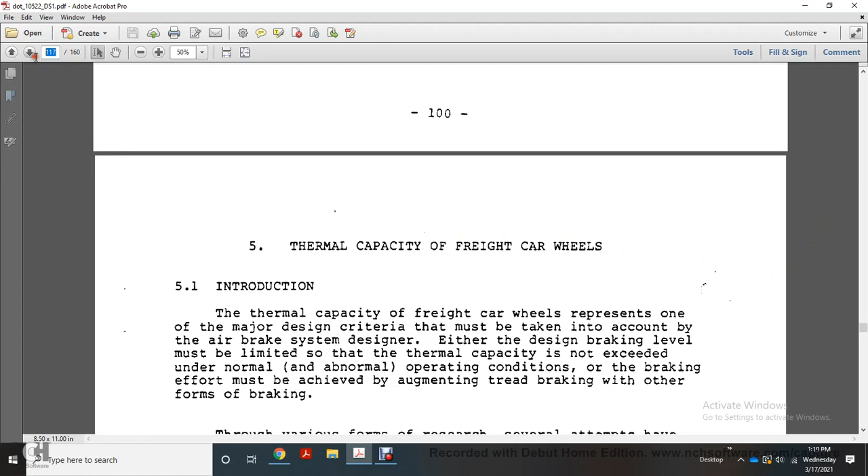Report number FRA ORD 7820, Brake System Design Optimization, Volume 2, Supplemental Data. We're on section 5, Thermal Capacity of Freight Car Wheels.

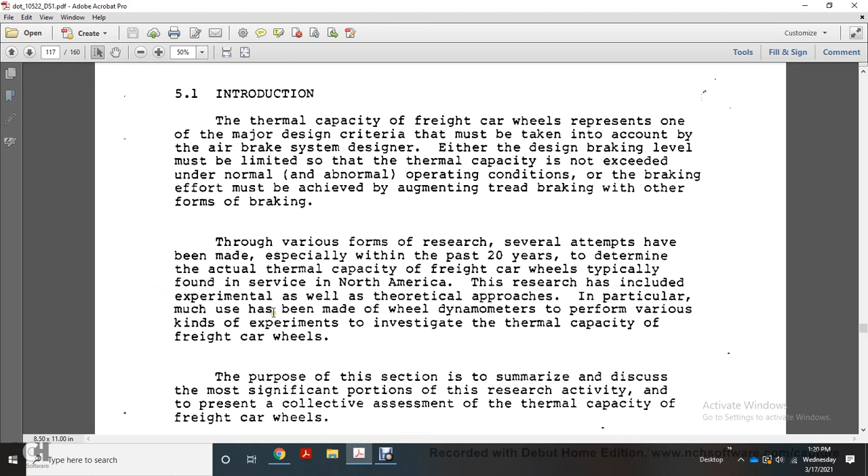Various forms of research, with several attempts made especially within the past 20 years, have tried to determine the actual thermal capacity of the freight car wheel. typically found in service in North America, the research includes experimental and theoretical approaches. In particular, much use has been made of dynamometers to perform various kinds of experiments investigating the thermal capacity of freight car wheels.

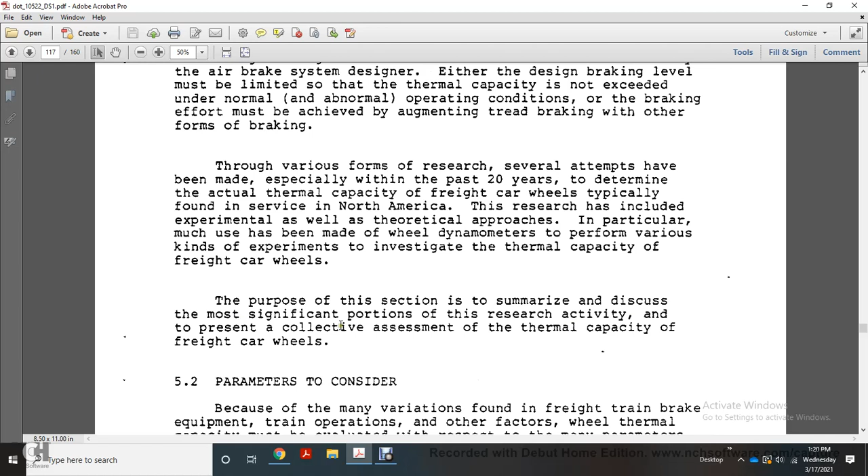The purpose of this section is to summarize and discuss the most significant portions of the research activities presenting a collective assessment of the thermal capacity of freight car wheels.

Parameters are considered because of the many variations found in train brake equipment and operation. The effect of wheel thermal capacity is evaluated with respect to many parameters that can affect it. These parameters include the following: cyclic versus drag braking, wheel geometry size and shape, wheel material and heat treatment, worn versus new wheels, brake shoe material and shoe alignment, and other considerations.

Each of these topics is discussed in the following items based on the research performed in recent years.

These wheels are exposed to alternating cycles of heating and cooling.

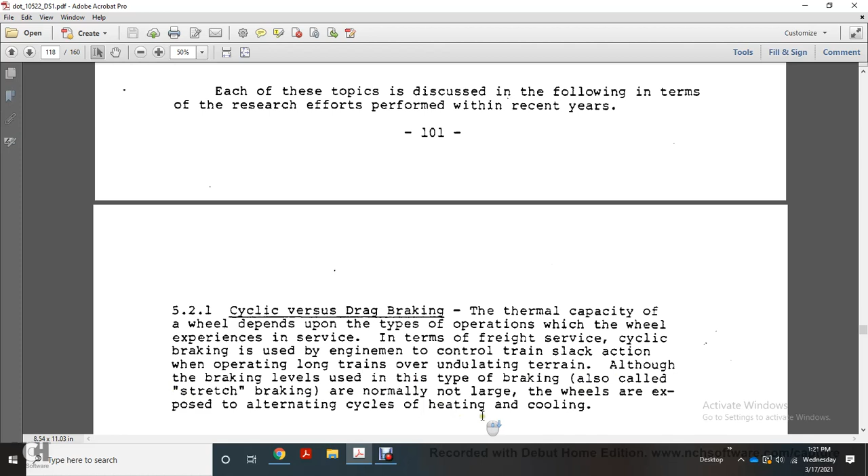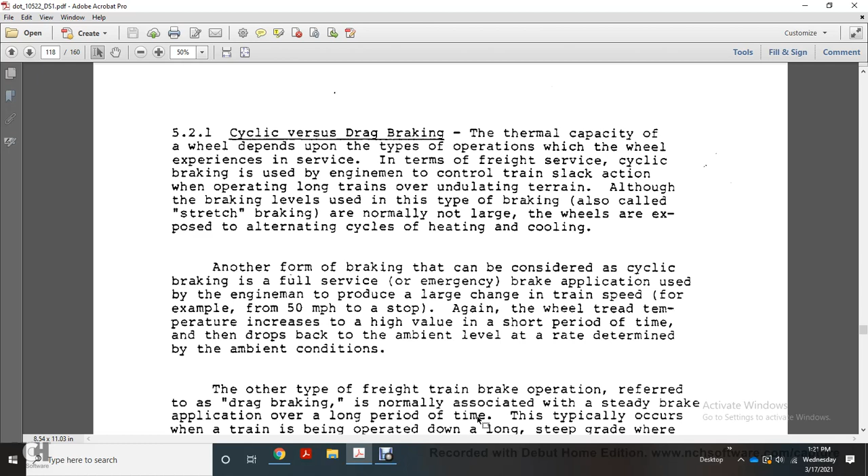Another form of braking limit can be considered cyclic braking: a full service or emergency brake application used by the engineman to produce a large change in train speed. For example, 50 miles an hour to a stop. The wheel tread temperature increases to a high value over a short period of time, then drops back to ambient level at a rate determined by ambient conditions.

The other type of freight train brake operation is referred to as drag braking, normally associated with a steady brake application over a long period of time. This typically occurs when a train is operated down a long steep grade, where train brakes are applied to balance the gravitational force of the grade.

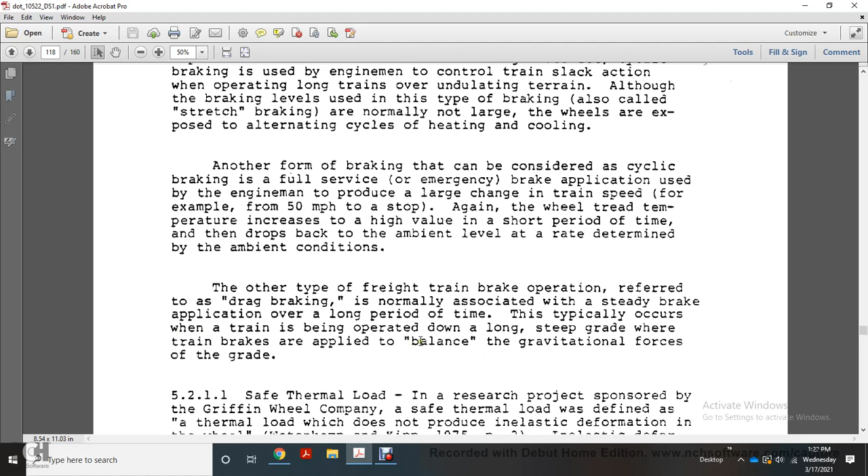Safe thermal load, from a research project sponsored by the Griffin Wheel Company, is defined as the thermal load which does not produce inelastic deformation in the wheel. Inelastic deformation produced in service because of braking manifests as residual stress in the wheel, and can be caused by a large variation of temperature between the wheel tread surface and other portions of the wheel. This variation of temperature is referred to as a thermal gradient.

Some investigators believe this thermal gradient to be more significant in causing wheel residual stress than an equivalent to even higher tread temperatures sustained over a long period of time.

In other words, thermal shock from cyclic braking is considered by some researchers to be more effective at damaging the wheel than a slow, uniform, high temperature brake application followed by a slow cooling process.

To place the thermal capacity of wheels in perspective with respect to cyclic and drag brake applications, the braking levels for both types of application must be known.

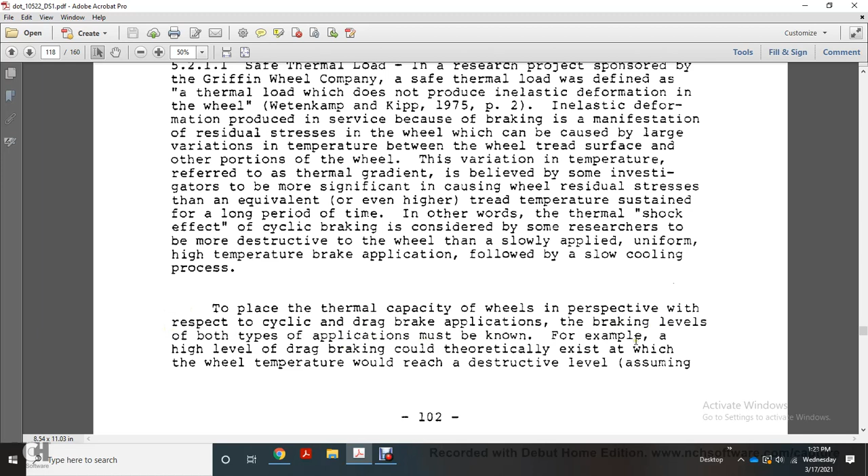For example, a high level of drag braking could theoretically exist in which the wheel temperature could reach a destructive level. Assuming the brake shoe would not disintegrate and the wheel would fail, the amount of cyclic braking would not be a factor.

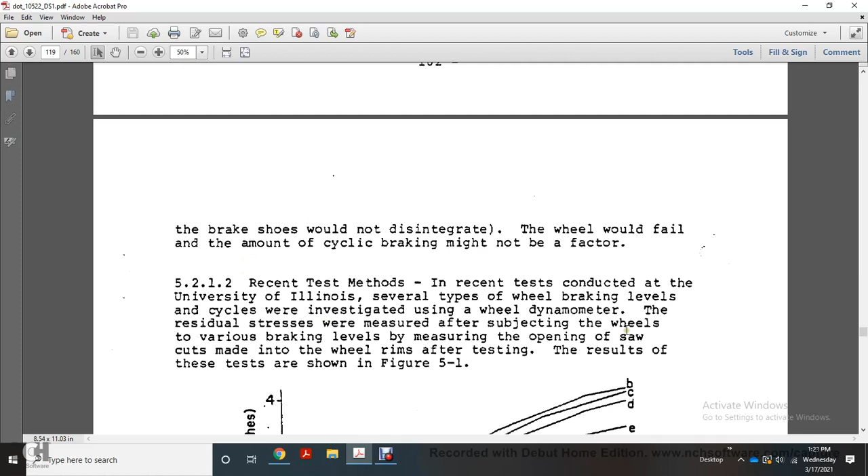Recent testing conducted at the University of Illinois investigated several types of wheel braking cycles, examining wheel dynamometer and residual stresses measured after subjecting the wheel to various brake levels. This was measured by the opening of saw cuts made in the wheel rim after testing. The results of these tests are shown in Figure 5-1.

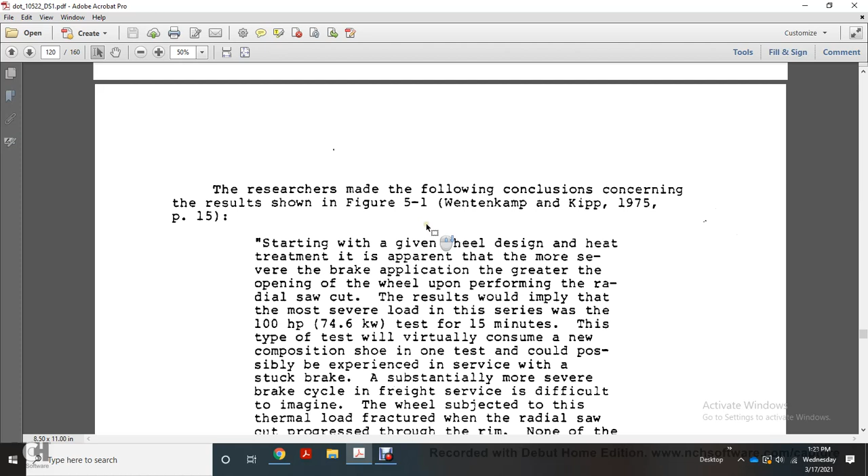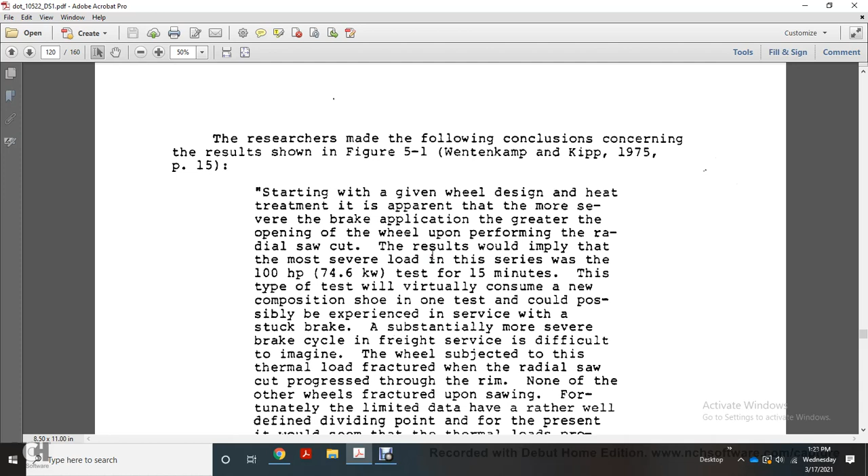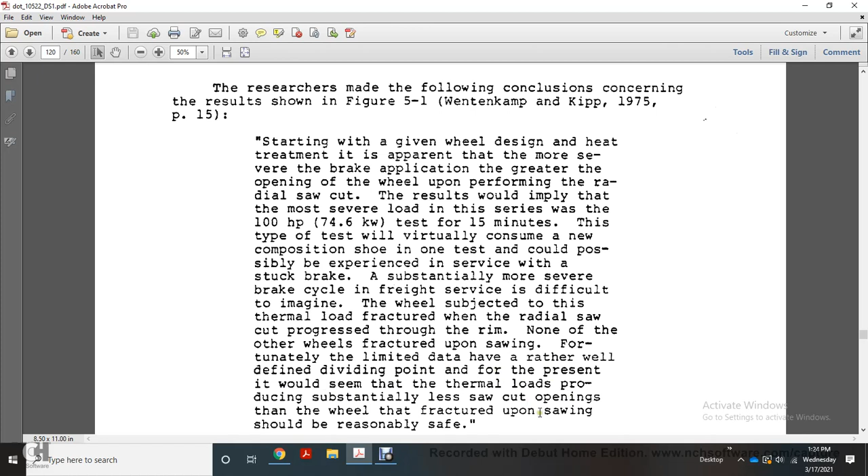The thermal load producing substantially less saw cut opening meant the wheel fracture upon sawing should be reasonably safe. It should be noted that in the above mentioned case of 100 horsepower for 15 minutes, the wheel did not fracture until the saw cut was made, with the tread temperature reaching 1146 degrees Fahrenheit, and the new composition brake shoe was consumed during the test. However, this wheel, combined with the physical load of repeated thermal cycling from actual train operation, can only be surmised.

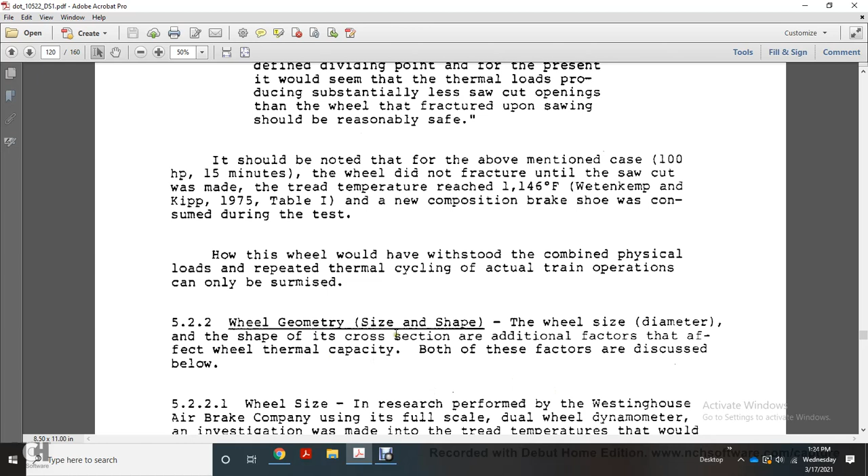Section 5.2.2: wheel geometry, size, and shape. The wheels have a diameter and shape of cross section, an additional factor affecting the wheel's thermal capacity. Both of these factors are discussed below. Wheel size and research were performed by the Westinghouse Air Brake Company, including a full-scale dual wheel dynamometer investigation into the tread.

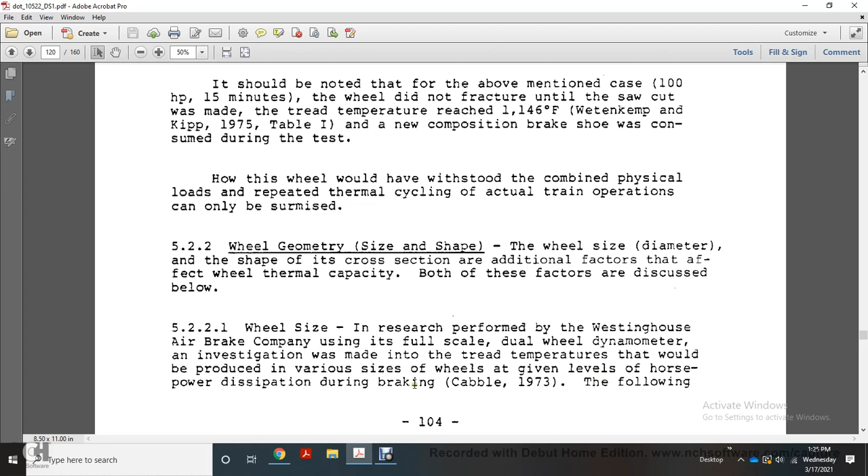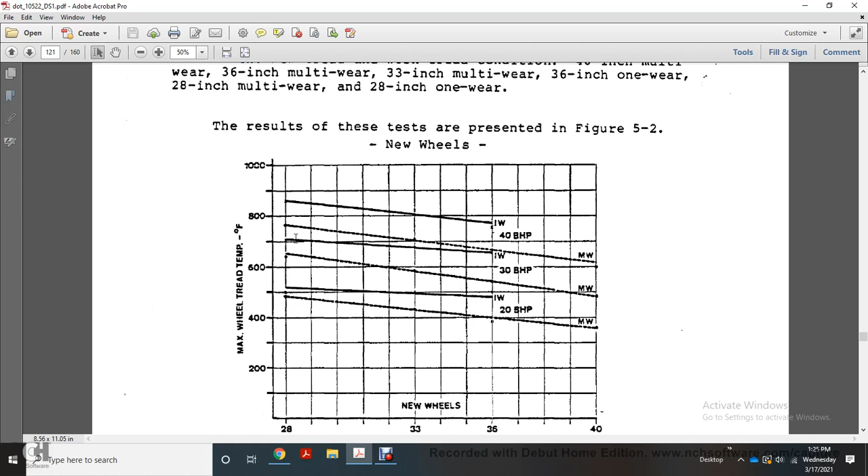The temperature that would be produced in various sizes of wheels was given as a function of horsepower dissipation during braking. The following diameter types of Class B wrought steel wheels were tested in both new tread and worn tread conditions: 40-inch multi-wear, 36-inch multi-wear, 33-inch multi-wear, 36-inch one-wear, 28-inch multi-wear, and 28-inch one-wear. Results of the tests are presented in Figure 5.2, showing new wheels with maximum wheel tread temperatures in Fahrenheit ranging from 0 to 200 to 1,000, for new wheels of 28, 33, 36, and 40 inches.

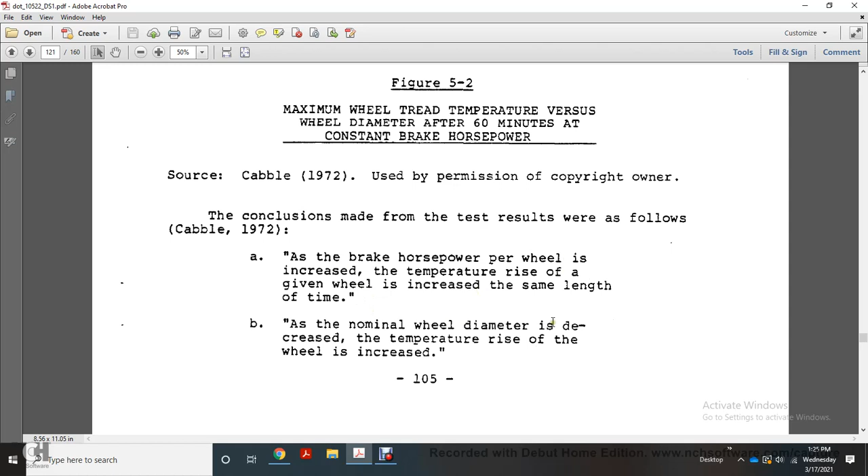The conclusions of the test results are as follows. A: as the brake horsepower per wheel increases, the temperature rise for a given wheel will increase with the same length. B: as nominal wheel diameter decreases, the temperature rise will increase.

C: as the actual wheel diameter due to wear decreases, the temperature rise will increase, within an approximate range of temperature through which these changes occur. The curve of temperature versus nominal wheel diameter is approximately a straight line.

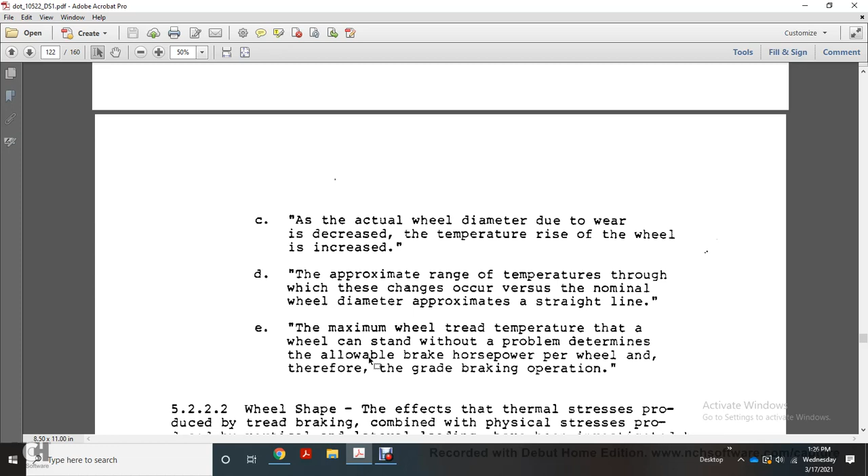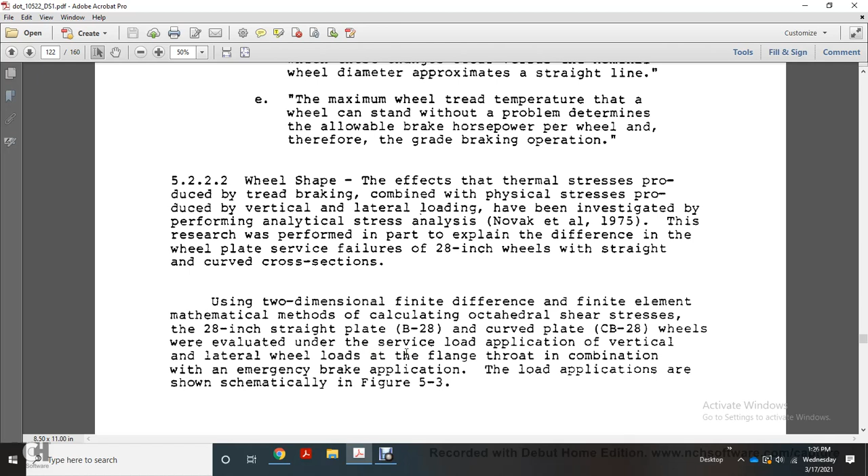Octahedral shear stress of 28-inch straight plate and curved plate CB28 wheels will be evaluated under the service load application for vertical and lateral wheel loads and flange throat loads, in combination with emergency brake application loads. These load applications are shown schematically in Figure 5.3.

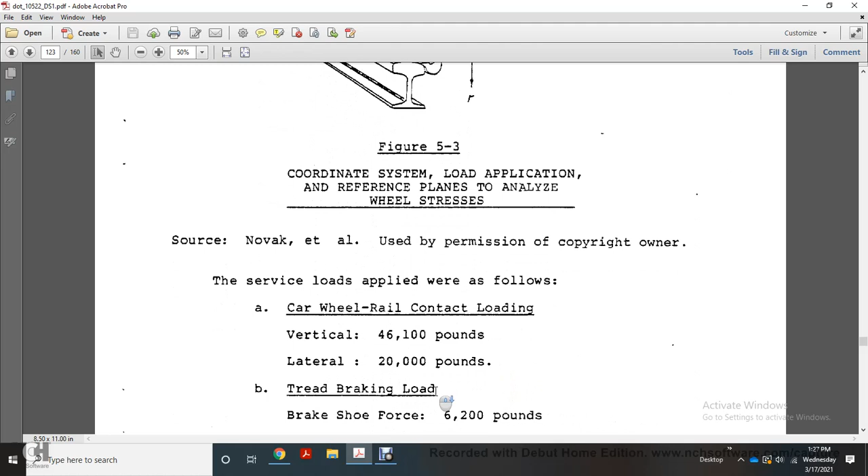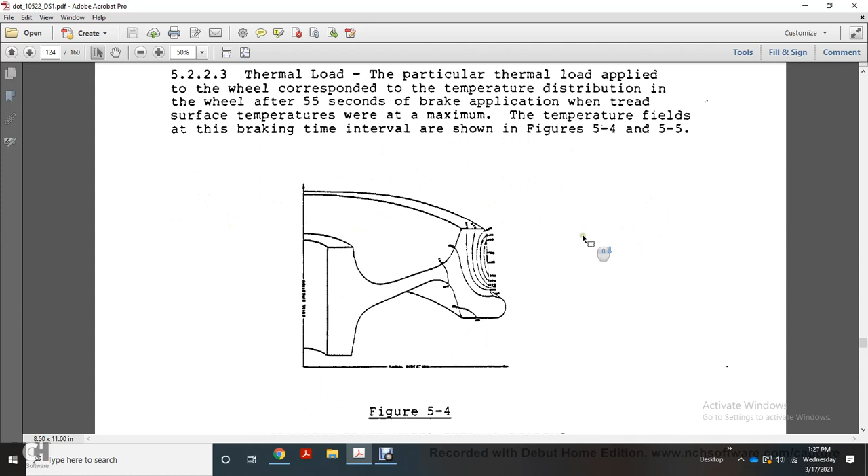A thermal load was applied to the wheel corresponding with the temperature distribution wheel, with a 55-second brake application to the tread surface at maximum temperature field. The braking intervals are shown in Figures 5.4 and 5.5: the straight plate wheel thermal loading, and then the curved plate wheel thermal loading.

The maximum octahedral shear stress was calculated as described by the authors. It was produced adjacent to the front hub fillet on the straight plate wheel, by this load application significantly higher than the stress, generated only by the rolling loads - vertical and lateral wheel loads.

This maximum stress occurred at approximately 45-degree wheel rotation, and diminished as the wheel rotated to the 180-degree position. The maximum octahedral stress intensity was recorded.

13,500 psi near the back of the rim fillet, also occurs after 45-degree angle of wheel rotation, diminished as wheel travel approached approximately 180 degrees.

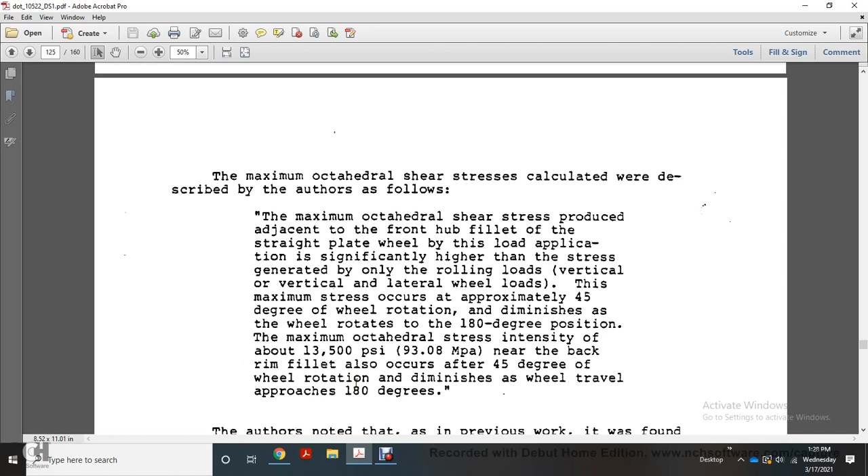The author noted that previous work found mechanical wheel-rail contact loads comparable to those found may not be sufficient to induce plate failure, whether with a straight plate, curved plate, or 28-inch wheel.

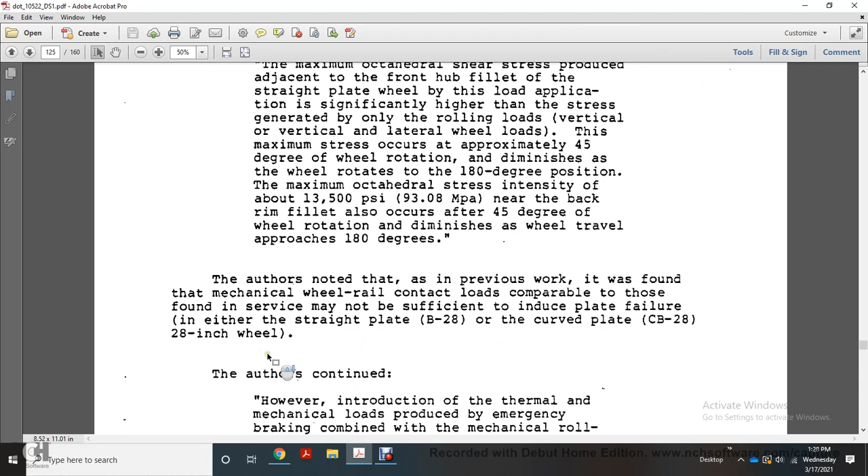The author continued that the introduction of thermomechanical loads produced by emergency braking, combined with mechanical rolling loads, produced a considerably higher octahedral shear stress level in the plate section of the B28 design compared to the CB28 design. This indicates the B28-inch wheel will develop a greater number of plate failures than the CB28, depending on the number of braking cycles during normal service operation.

Since both wheels are designed and subjected to essentially the same service conditions, where plate failures have occurred, only the B28 design is most likely to exceed the threshold necessary to initiate fatigue failure - the CB28 plate stresses remain below that threshold.

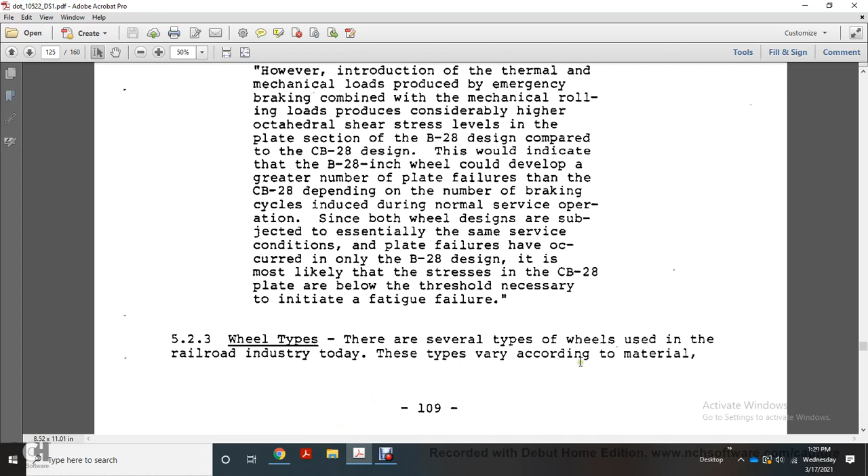There are several types of wheels used in the railroad industry today. They vary according to material, method of manufacture, and design differences. Both wrought steel and cast steel wheels are approved for new car construction.

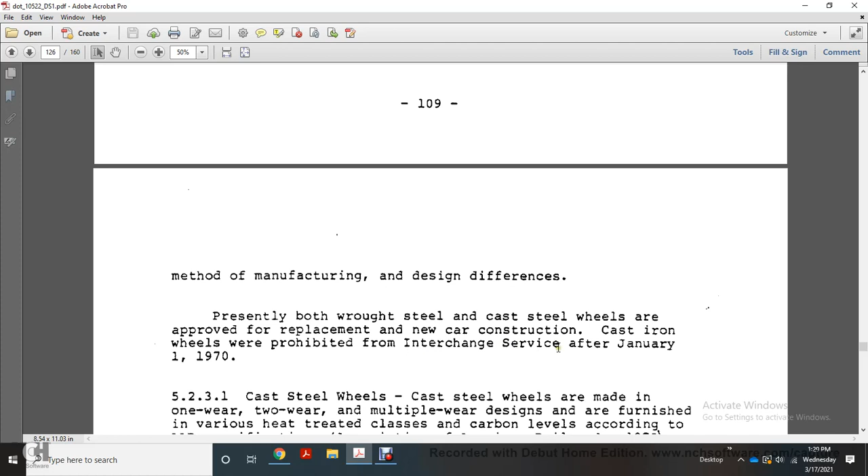Cast iron wheels were prohibited from interchange service after January 1st, 1970. Cast steel wheels are made in one-wear, two-wear, and multiple-wear designs, furnished in various heat-treated classes with carbon levels according to AAR specifications.

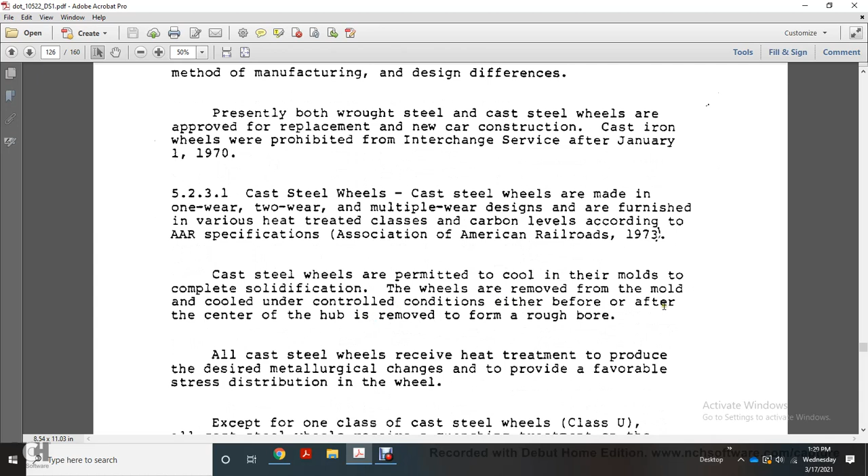Cast steel wheels are permitted to cool in the molds until completed solidification, then removed from the mold and cooled under controlled conditions, either before or after boring the hub to form a rough bore. All cast steel wheels receive heat treatment to produce the desired metallurgical change that provides favorable stress distribution in the wheel, except for one class of cast steel wheel: Class U.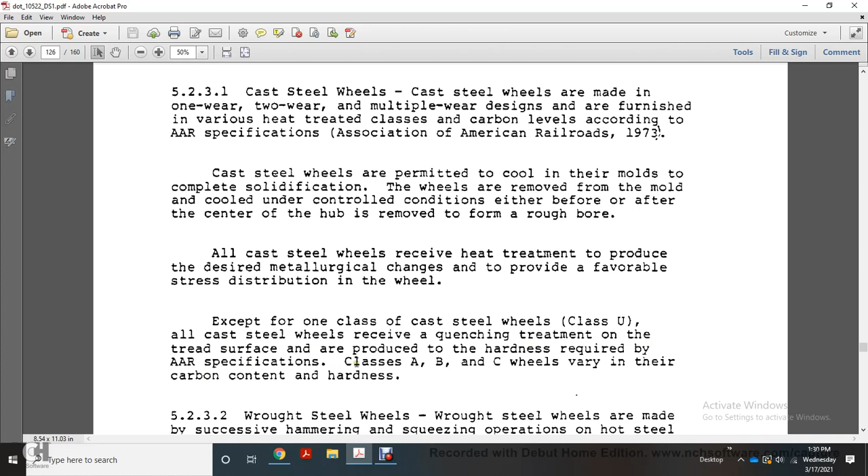All cast steel wheels receive a quenching treatment on the tread surface to produce the hardness required by AAR specification. Class A, B, and C wheels vary in their carbon content and hardness.

Section 5232: wrought steel wheels. Wrought steel wheels are made by hammering and squeezing operations on hot steel blocks. After final shaping, the wheel is controlled-cooled; wrought steel wheels are often heat treated after initial cooling, either fully or rim-quenched only. Proper heat treatment further modifies the wheel metallurgy, strengthening and hardening the wheel.

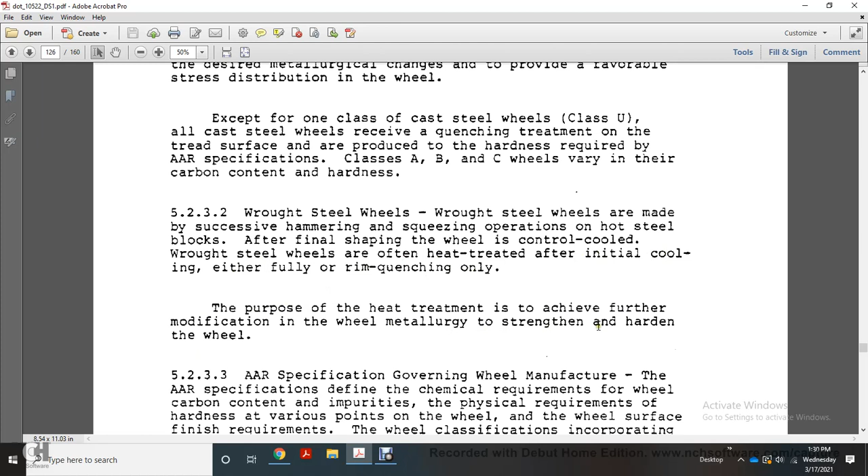Section 5233: AAR specification governing wheel manufacture. The AAR specification defines the chemical requirements of the wheel - carbon content, impurities - the physical requirements of hardness at various points on the wheel surface, the finish, and the requirements of wheel classification. These requirements are shown in Table 5.1.

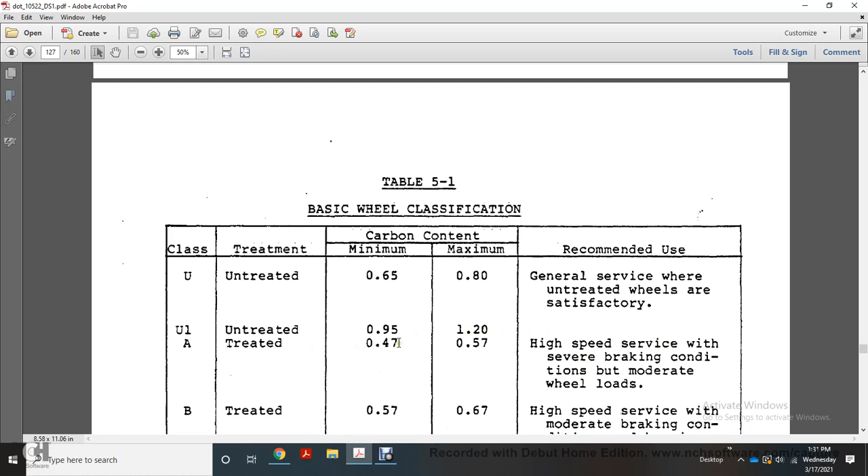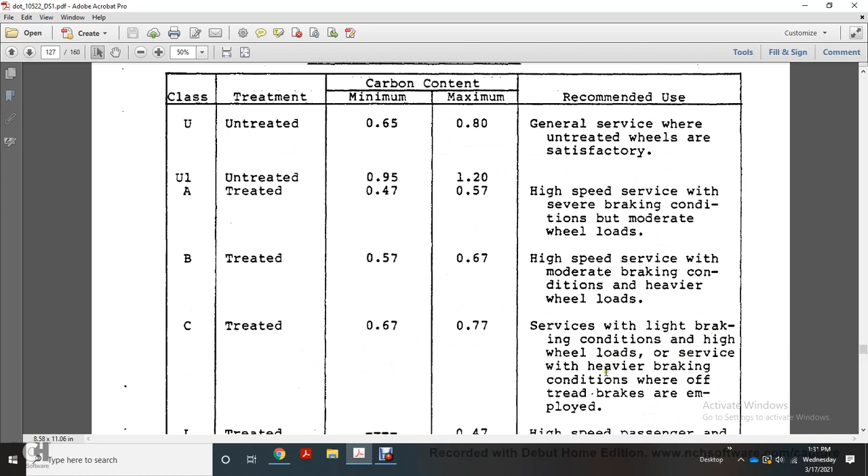Class A, treated, 0.47 to 0.57 carbon, same recommended use. Class B, treated, 0.57 to 0.67, for high-speed service with moderate braking conditions and heavier wheel loads. Class C, treated, 0.67 to 0.77, for service with light braking conditions, high wheel loads, or service with heavier braking conditions where off-tread brakes are employed.

Class L, treated, has a maximum carbon content of 0.47, recommended for high-speed passenger transit. Class A wheels, with low carbon range, are most resistant to thermal cracking. Class C wheels are more subject to thermal cracking but have improved wear properties under heavy loads. Class B wheels represent the compromise between Class A and Class C wheels.

Section 524: worn versus new wheels.

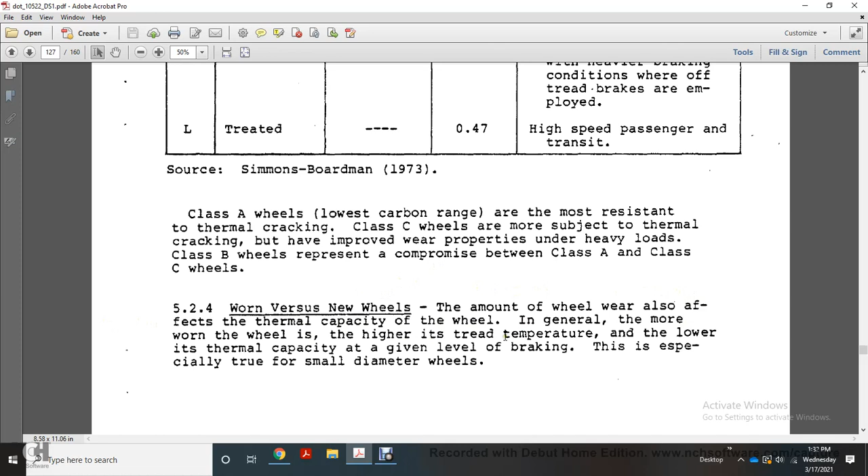The amount of wheel wear affects the thermal capacity of the wheels in general. With more worn wheels, the tread temperature is higher and the thermal capacity is lower, given the level of braking. This is especially true with smaller diameter wheels. In tests performed at the Westinghouse Air Brake Company, wheels were subjected to constant brake horsepower levels for long periods of time, up to 60 minutes.

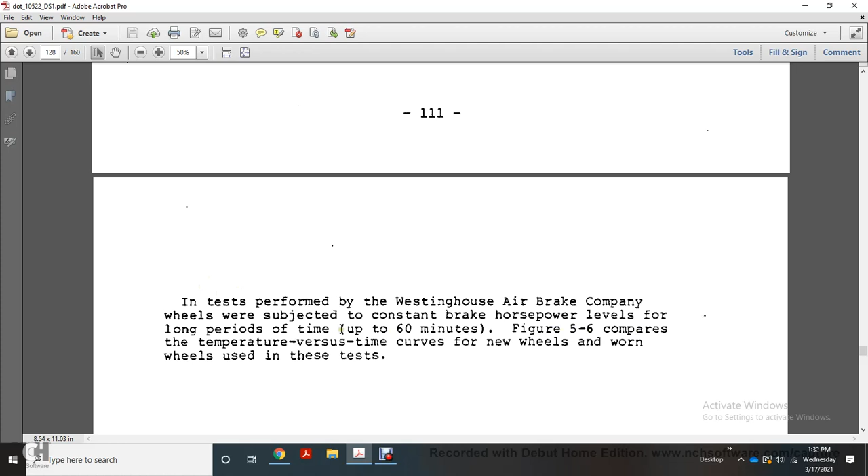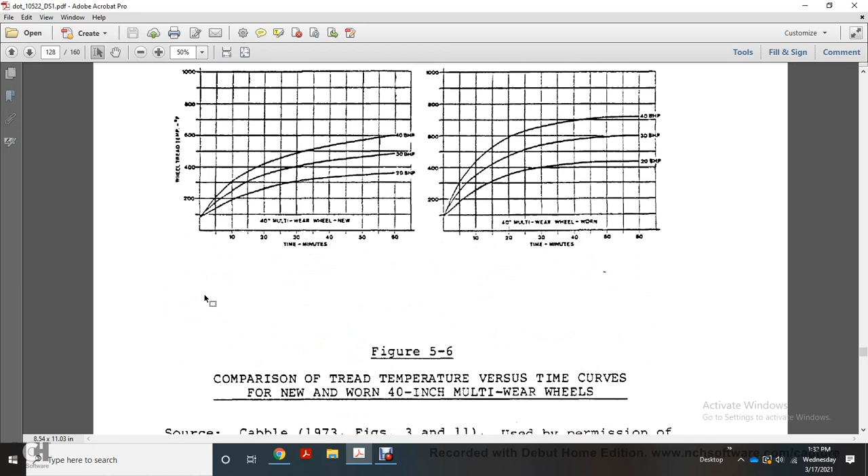Figure 5.6 compares the temperature versus time curves of new and worn wheels tested, showing time in minutes against wheel tread temperatures.

Maximum tread temperature reached at 40 brake horsepower was approximately 600 degrees Fahrenheit for the new wheel, versus approximately 720 degrees Fahrenheit for the worn wheel, an increase of 120 degrees Fahrenheit. This shows the temperature effect is even more apparent with small diameter wheels.

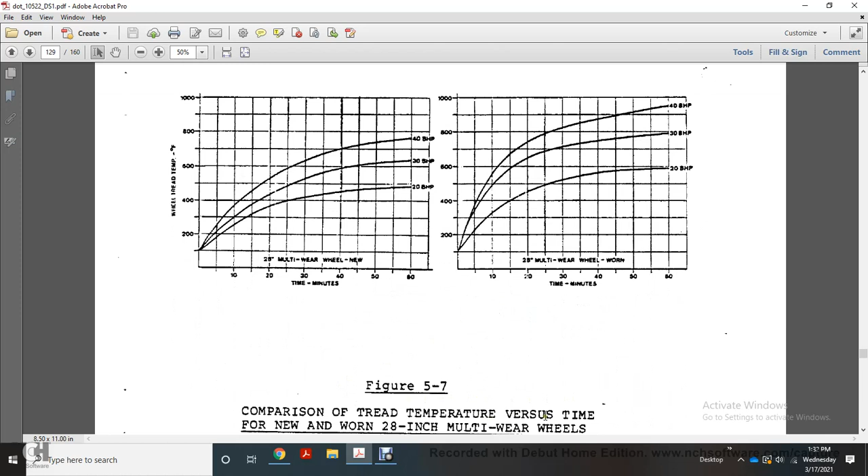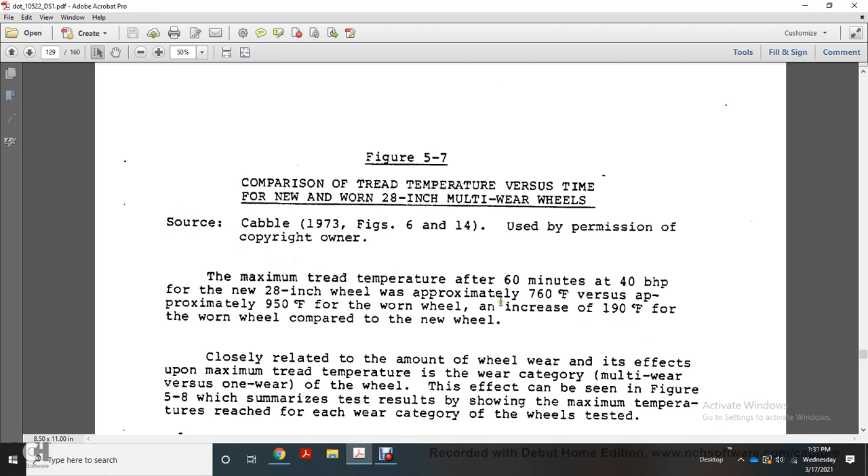This is shown in figure 5.7, which compares tread temperature versus time for new and worn 28-inch multi-wear wheels. Maximum tread temperature over 60 minutes with approximately 40 horsepower on the 28-inch wheel reached approximately 760 degrees Fahrenheit for the new wheel versus approximately 950 degrees Fahrenheit for the worn wheel, an increase of 190 degrees Fahrenheit.

The closely related relationship between the amount of wheel wear and the maximum tread temperature, comparing multi-wear versus one-wear wheel categories, can be seen in figure 5.8, which summarizes the test results showing maximum temperatures reached for each wear category of wheels tested.

In general, one-wear wheel temperatures are higher than multi-wear temperatures when the wheels are new. For worn wheels, the difference between one-wear and multi-wear temperatures becomes almost negligible. Wheel tread temperature increases inversely with wheel diameter and directly with the amount of wheel wear.

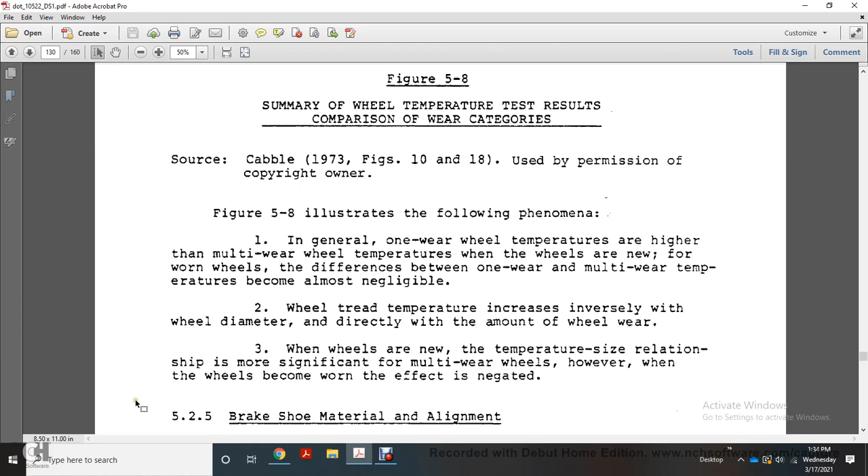When wheels are new, the temperature-size relationship is significant for multi-wear wheels. However, when the wheels become worn, this becomes less significant.

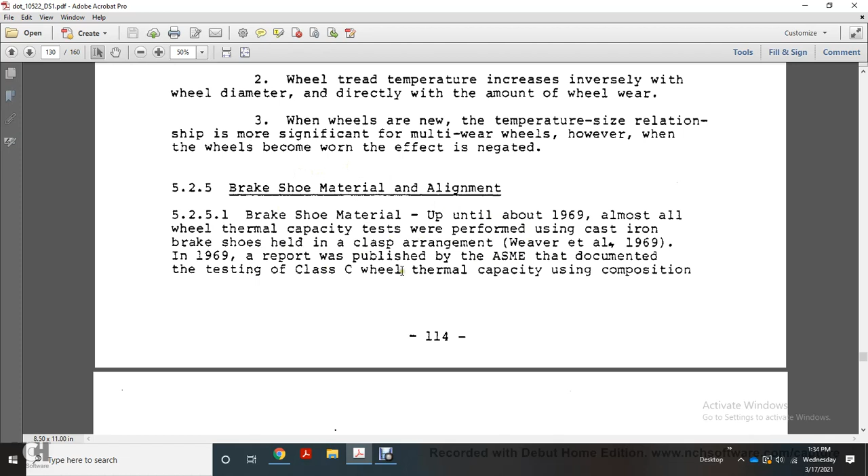Section 5.2.5, brake shoe material and alignment. Up until 1969, almost all wheel thermal capacity tests were performed using cast iron brake shoes held in a clasp arrangement. In 1969, a report published by ASME documented testing of Class C wheel thermal capacity using composition Cobra brake shoes. The report briefly reviewed earlier tests performed.

The University of Illinois 1950 tests used stop tests with a rapid deceleration rate from 115 miles an hour. These tests used a wheel load of 20,000 pounds in conjunction with a brake shoe force of 20,000 pounds on each of two cast iron brake shoes held in clasp arrangement. The braking duty was representative of a total kinetic energy of 9 million foot-pounds per stop.

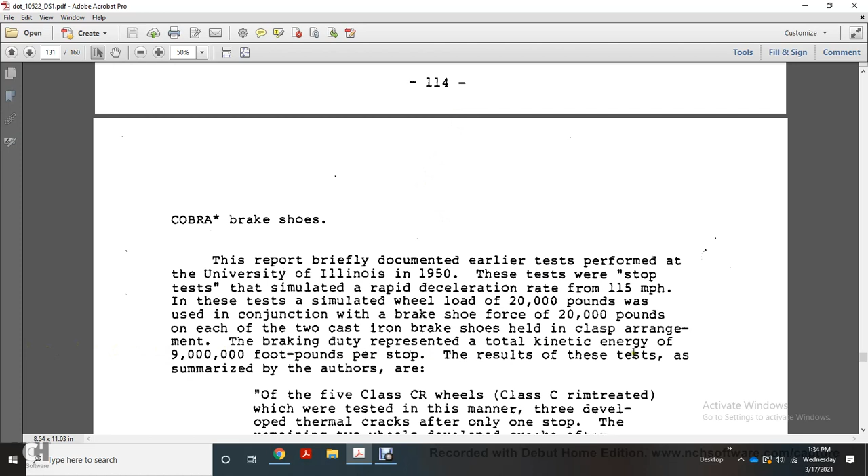The results of these tests, as summarized by the authors, covered 5 Class C rim-treated wheels tested in this manner; three developed thermal cracks after only one stop. The remaining 2 wheels developed cracks after 5 stops and 7 stops, respectively.

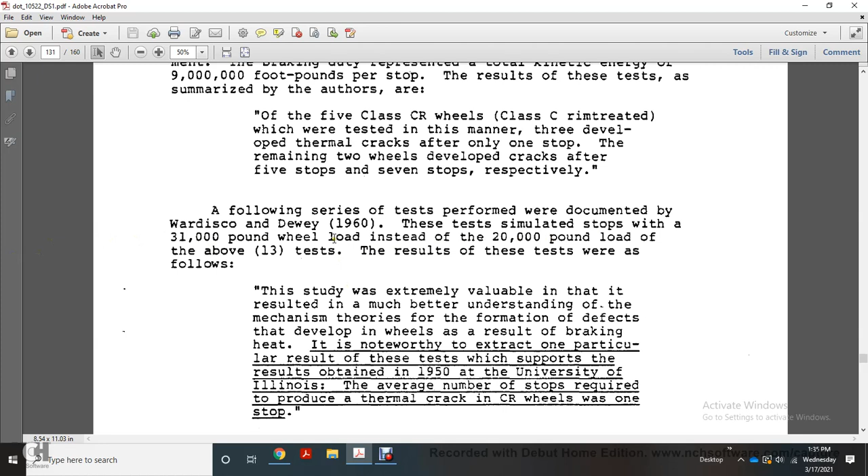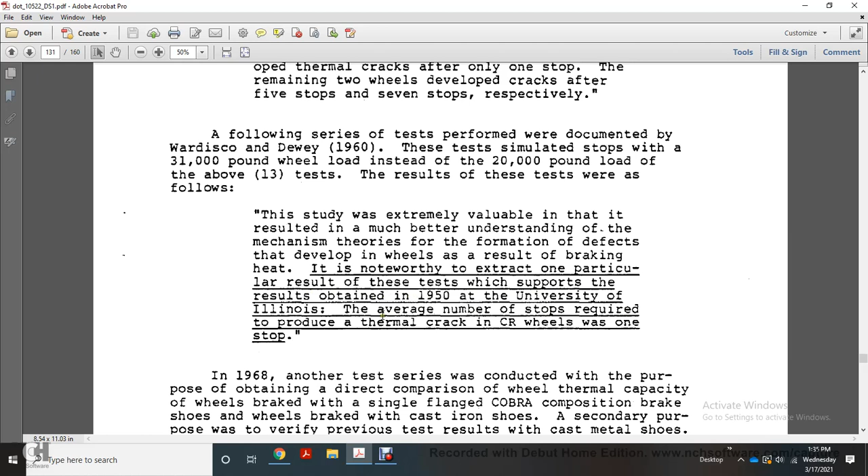These studies are extremely valuable in that they resulted in a much better understanding of the mechanisms and theories behind the formation of defects developing in wheels as a result of braking. It is noteworthy that the particular results of these 1950 University of Illinois tests determined that the stops required to produce thermal cracking in CR wheels was just one stop.

In 1968, another test series was conducted with the purpose of obtaining a direct comparison of wheel thermal capacity for wheels braked with single-flange Cobra composition brake shoes versus wheels braked with cast iron shoes, with the second purpose being to verify previous test results. For the cast metal shoe, these test dynamometer stops were particularly oriented towards metro liner braking conditions.

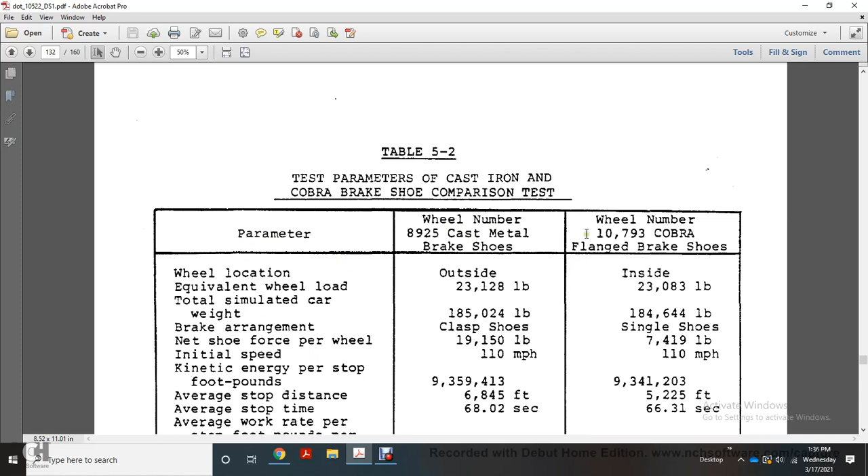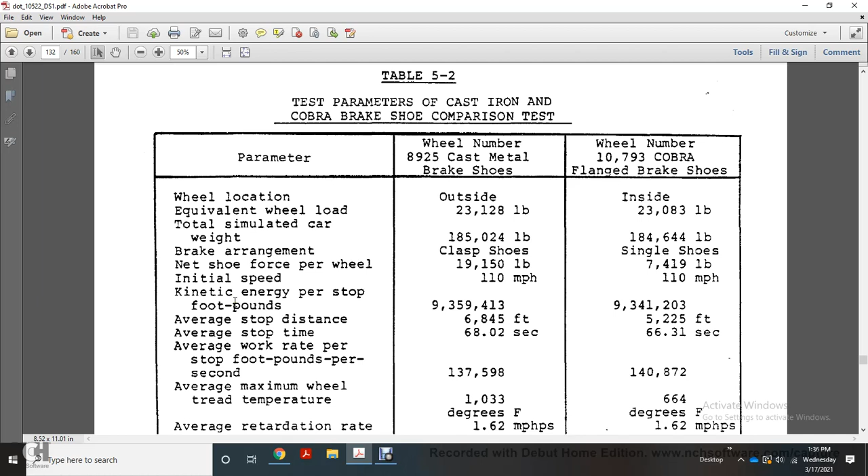The test results were summarized after approximately 20 emergency stops were completed. Each wheel, number 8925, with metal brake shoes developed hairline, skin-deep thermal cracks. The abundance of these thermal cracks increased with each successive stop.

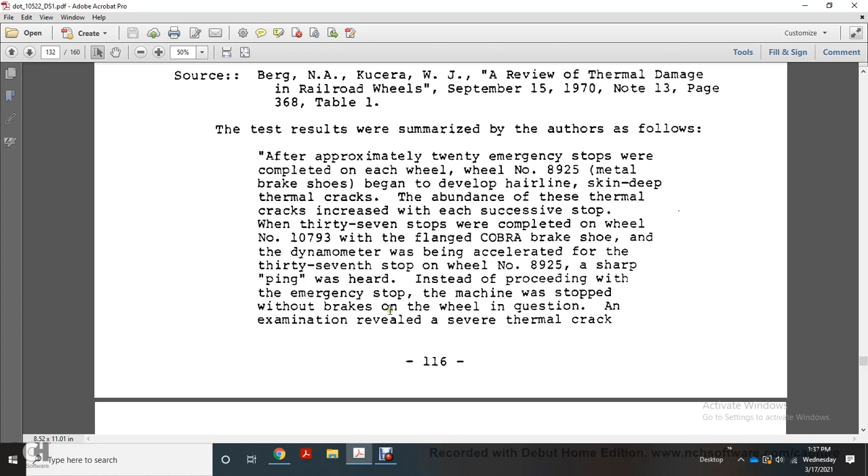A sharp ping was heard instead of proceeding with the emergency stop. The machine was stopped without braking on the wheel in question, and an examination revealed a severe thermal crack extending almost across the complete width of the tread of the wheel. The number 8925 test was discontinued at this point.

Braking duty dissipated 9 million foot-pounds of kinetic energy at a rate over 137,000 foot-pounds per second with a cast iron brake shoe, and 140,000 foot-pounds per second with a Cobra brake shoe. This exceeds any practical service standard, and exceeds the previously recommended a limit of 125,000 foot-pounds per second.

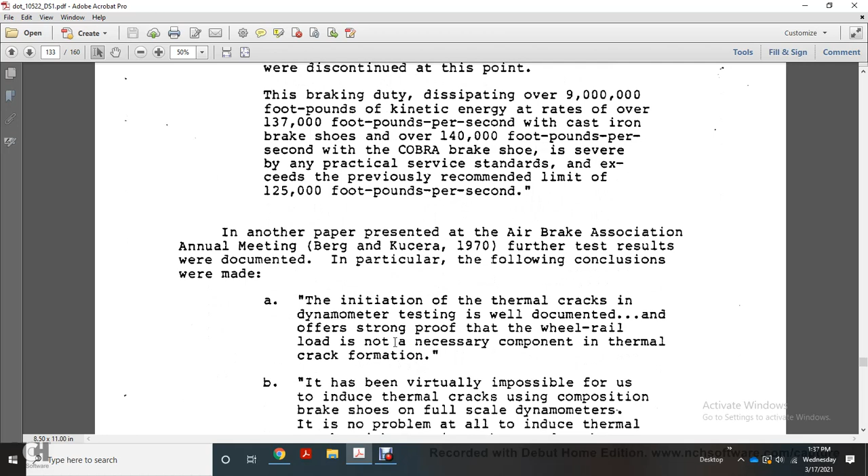Another paper presented at the Air Brake Association annual meeting documented further test results, with the following conclusions: the initiation of thermal cracks in dynamometer testing is well documented, and the data offers strong proof that wheel-rail load is not a necessary component, with thermal cracking formation virtually impossible to induce using composition brake shoes.

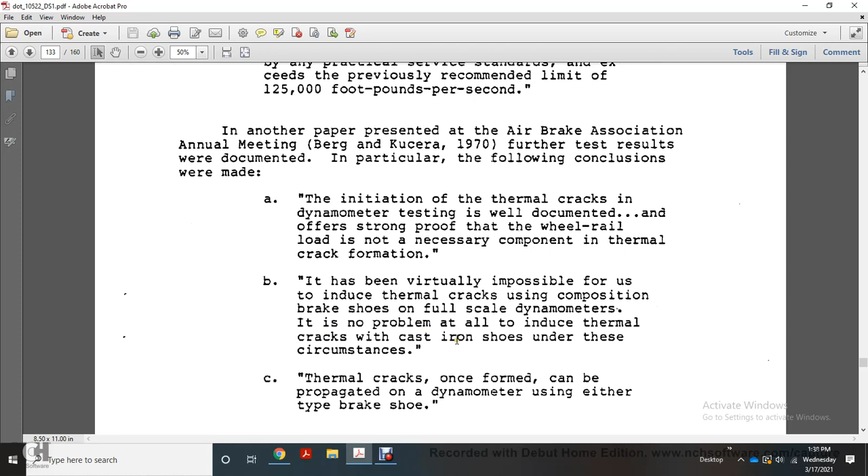On a full-scale dynamometer, there was no problem inducing thermal cracks with cast iron shoes under these circumstances. Thermal cracks, once formed, can be propagated on the dynamometer using either type of brake shoe. The second conclusion stated is explained by examining the heating pattern characteristics of cast iron versus composition brake shoes.

The characteristics are compared on the following page, figure 5-9, which shows the comparison of average and maximum tread temperature for cast iron versus composition brake shoes.

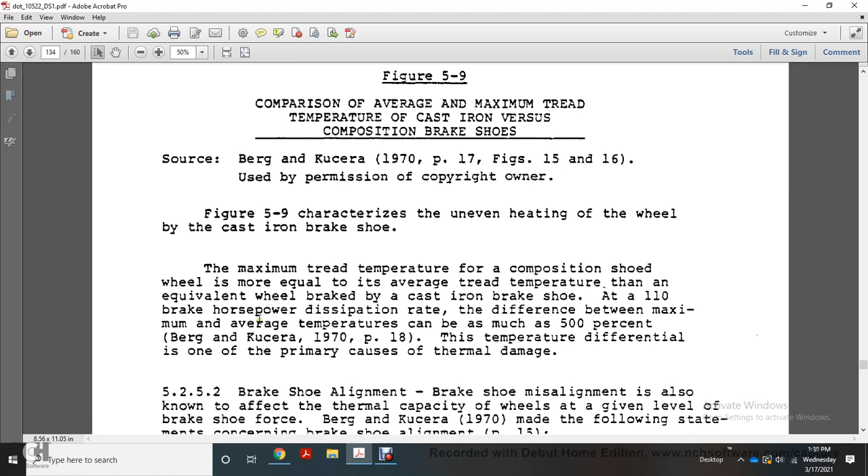For the maximum tread temperature of the composition shoe, the wheel is more or less equal to the average tread temperature for the equivalent wheel braked by a cast iron brake shoe, at a 110 brake horsepower dissipation rate. The difference between maximum and average temperature can be as much as 500%, and this temperature differential is one of the primary causes of thermal damage.

Section 5.2.5.2, brake shoe alignment: brake shoe misalignment may also adversely affect the thermal capacity of the wheels, given the level of the brake shoe force.

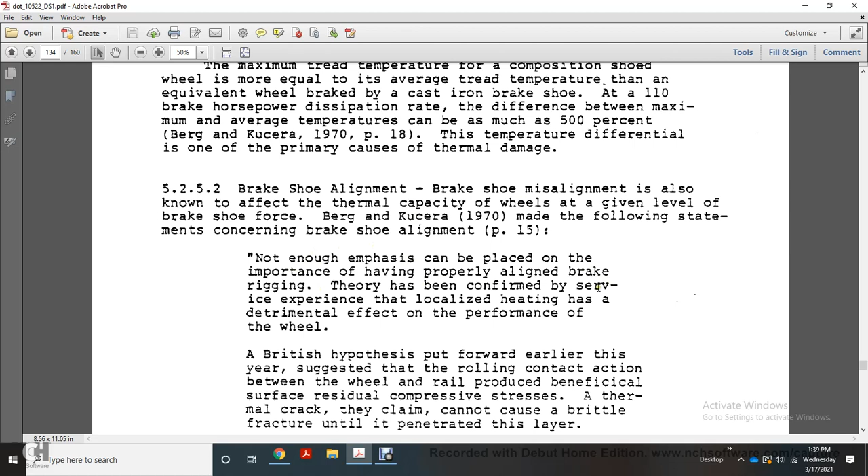Berg and Kucera made the following statement concerning brake shoe alignment, on page 15: not enough emphasis can be placed on the importance of having proper brake rigging alignment, as theory has been confirmed by service experience of localized heating having a detrimental effect on the performance of the wheel.

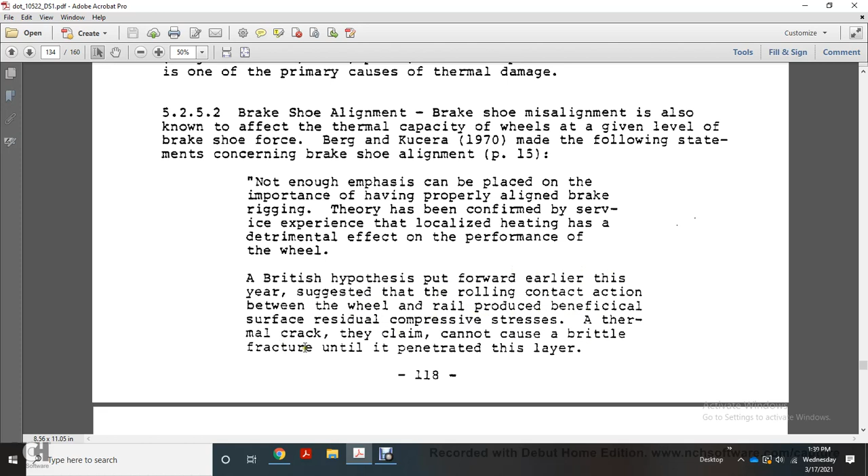The British hypothesis put forward earlier suggests that the rolling contact action between the wheel and rail produces beneficial surface residual compressive stresses. A thermal crack, they claim, cannot cause a brittle fracture unless it penetrates this layer.

Furthermore, the brake shoe must not be allowed to wander over the front of the rim, leaving the thermal cracking area unprotected by the preceding rolling contact. For this same reason, the British railroads have abandoned the use of flanged shoes except for slow-speed vehicles.

Other considerations: several other considerations must be investigated when estimating wheel thermal capacities. They are briefly discussed in the following section.

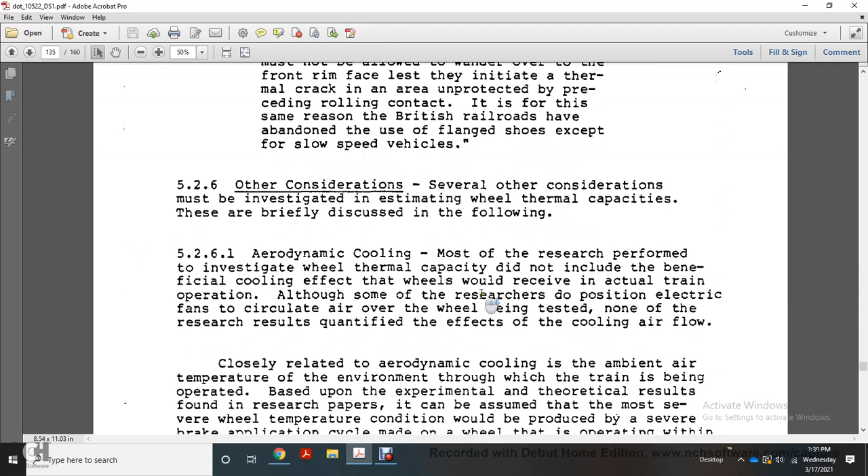Aerodynamic cooling: most of the research performed investigating wheel thermal capacity did not include the beneficial cooling effect that wheels would receive during actual train operation, although some research did position electrical fans circulating air over the wheel being tested. None of the research results quantified the effects of this cooling airflow.

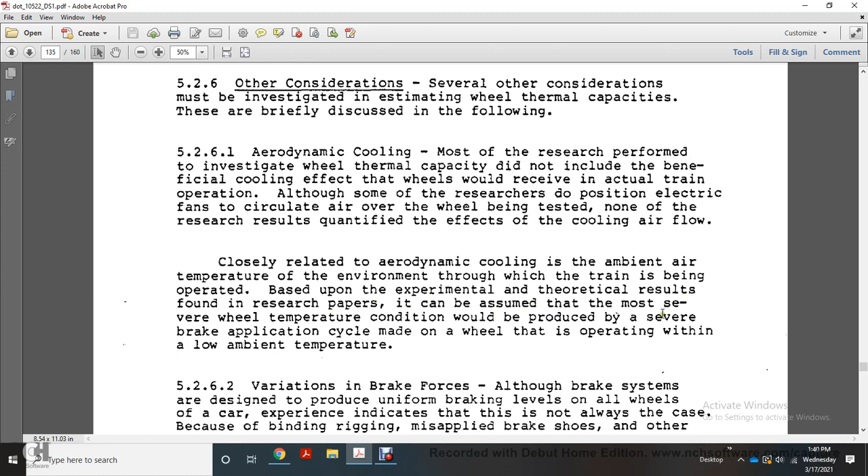Closely related to aerodynamic cooling is the ambient air temperature of the environment through which the train is being operated. Based upon experimental and theoretical results found in research papers, it is assumed that the most severe wheel temperature condition for a given level braking application cycle is produced on a wheel operating at low ambient temperature.

Section 5.2.6.2, variation in brake force: although the brake system is designed to produce a uniform brake level to all wheels on the car, experience indicates that this is not always the case, because of binding rigging or misapplied brake shoes. These and other causes result in substantial variation of actual brake shoe force from one wheel to another on the same car.

This can cause higher than normal wheel tread temperatures on one or more wheels within the train.

Slid flat wheels: slid flat wheels are a common problem of present train brake systems, and it is rare that a freight train passes without at least one pair of slid flat wheels, to one degree or another.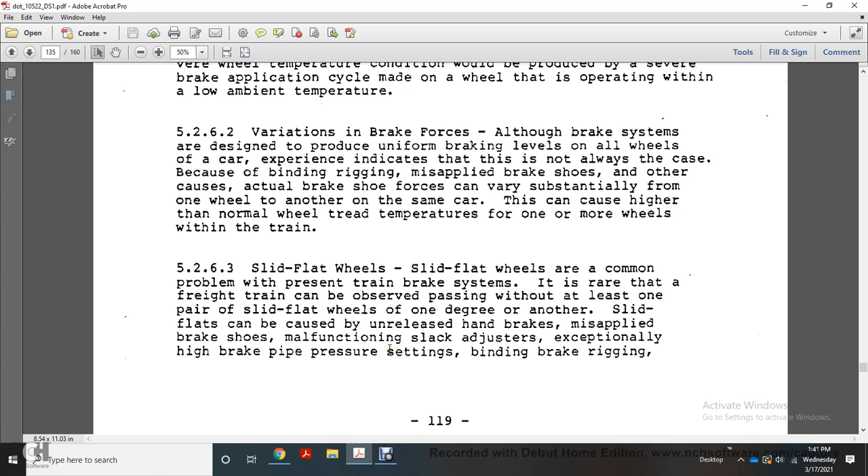Slid flat wheels can be caused by unreleased hand brakes, misapplied brake shoes, malfunctioning slack adjusters, exceptionally high braking brake pipe pressure settings, binding brake rigging, malfunctioning control valves, and probably many other causes. Regardless of the cause of the slid flat wheels, the sliding process itself generally produces high localized wheel tread temperatures.

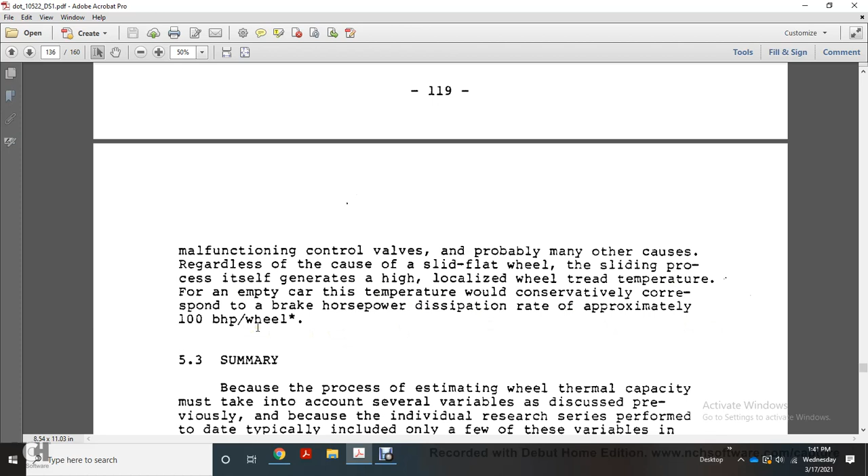Empty car temperature would conservatively correspond to the brake horsepower dissipation rate, approximately 100 brake horsepower dissipation through the wheel.

5.3 Summary. The process of estimating wheel thermal capacity must take into account several variables discussed previously. Because individual research series performed to date typically include only a few variables in a given test series, it's difficult to provide a collective assessment of thermal capacity for freight car wheels subject to tread braking. However, a summary can be made regarding the nature of braking technology and operating practices that can result in the most beneficial braking while simultaneously maintaining safe thermal loading.

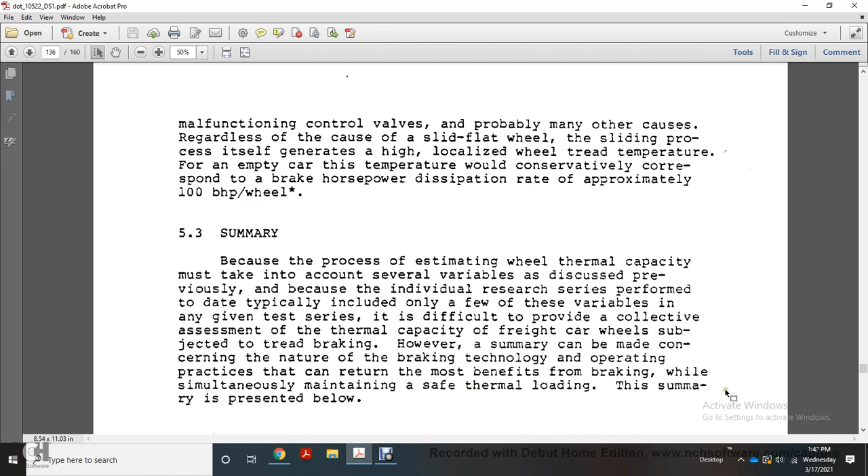These summaries are presented below. Research on brake shoes shows that the composition brake shoe produces a lower wheel temperature gradient at the equivalent horsepower dissipation rate compared to a cast iron shoe. Two reasons have been put forward to explain these results. First, the tread temperature distribution across the tread and axle varies more uniformly with a composition brake shoe. The cast iron shoe tends to form rings and bands of extremely high temperature on the tread, creating local hotspots. The more uniform temperature distribution produced with the composition brake shoe results in a smaller temperature gradient in the radial direction, producing lower wheel stresses.

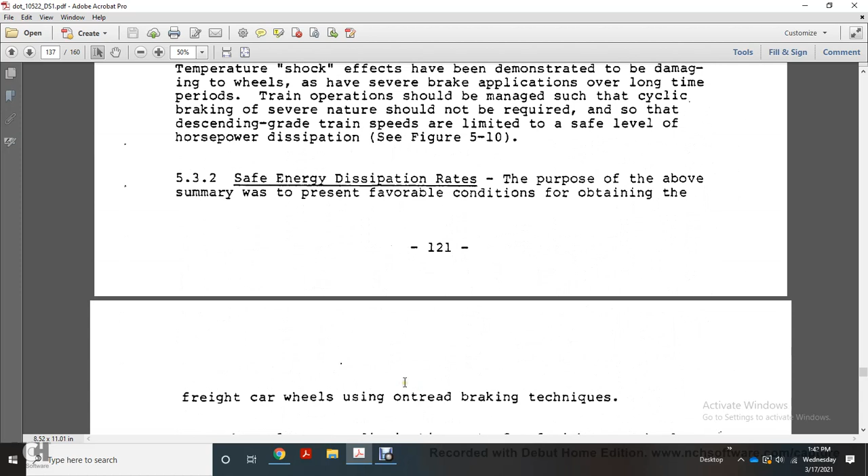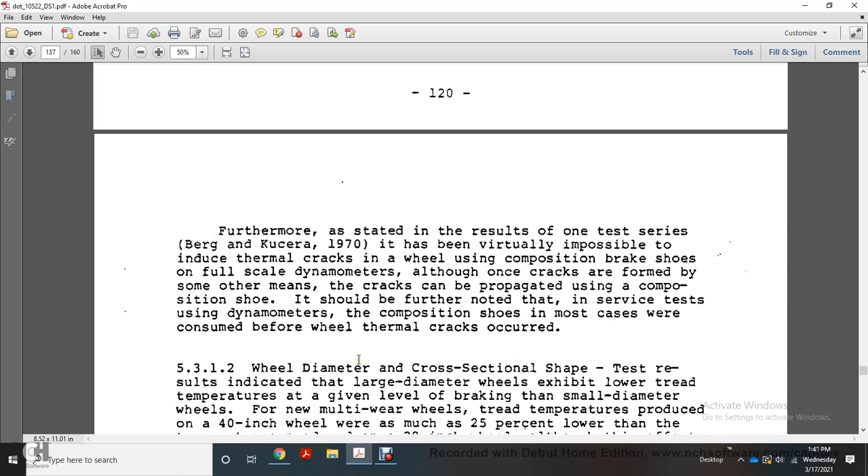Wheel diameter and cross-sectional shape: test results indicated that large diameter wheels exhibit lower tread temperature for a given level of braking compared with small diameter wheels. For multi-wear wheels, tread temperature produced within a 40-inch wheel was as much as 25% lower than temperature produced in a 28-inch wheel. Although the effect was not significant, a theoretical analysis for the 28-inch wheel would indicate that with combined physical and thermal loads, the curved plate 28-inch wheel exhibited substantially reduced wheel stresses compared with the straight plate 28-inch wheel.

This result is substantiated by the fact that wheel plate failures in selected freight train operations occurred exclusively with straight plate wheels.

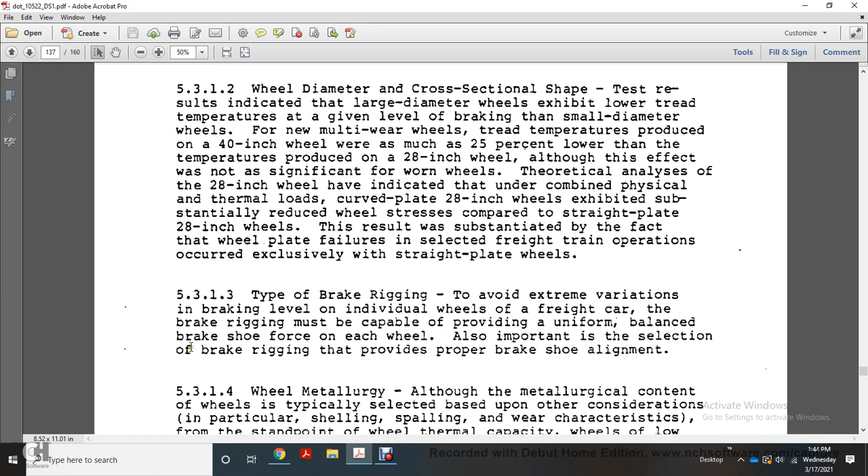Type of brake rigging: to avoid extreme variation of brake levels across individual wheels of the freight car, the brake rigging must be capable of providing uniform, balanced brake shoe force for each wheel. Also important is the selection of brake rigging that provides the proper brake shoe.

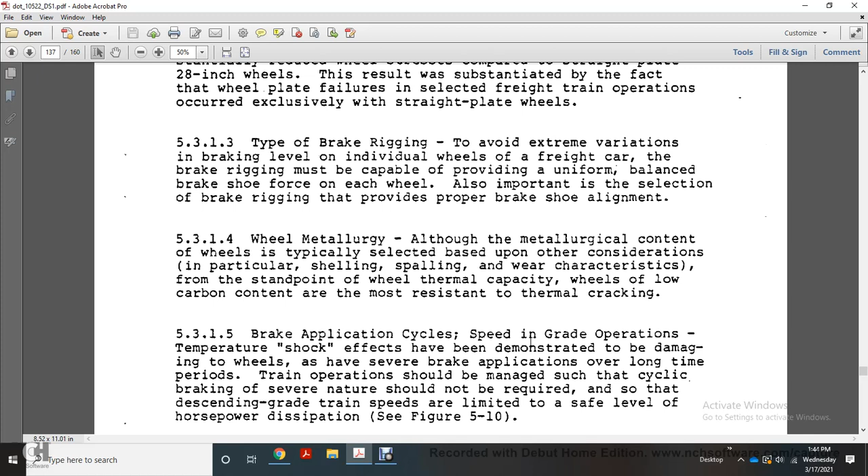Wheel metallurgy: although the metallurgical content of wheels is typically selected based on consideration of shelling, spalling, and wear characteristics, from the standpoint of wheel thermal capacity, wheels with lower carbon content are more resistant to thermal cracking.

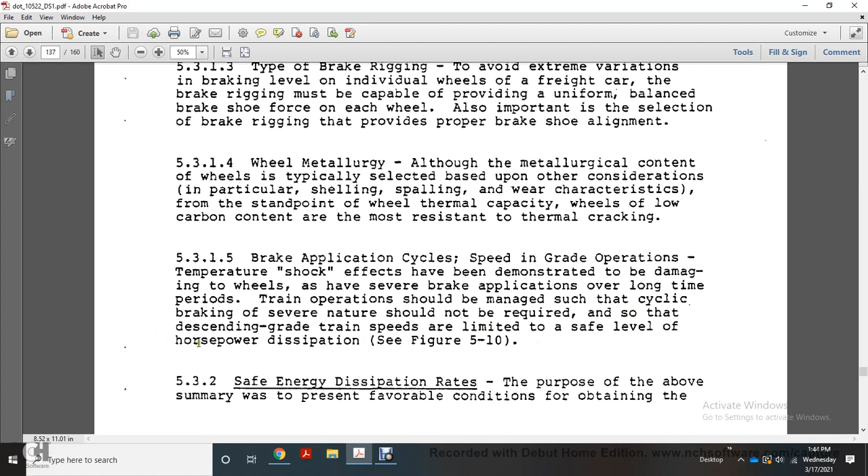Brake application cycle: speed with grade operation and temperature shock effects have been demonstrated to be damaging for wheels when brake application occurs over one large time period. In operation, braking should be managed cyclically. Severe braking should not be required, so that on descending grades, temperature and speed are limited to a safe level of horsepower dissipation. The purpose of determining this safe energy dissipation rate is to present favorable conditions for obtaining freight car wheel life, given on-tread braking techniques.

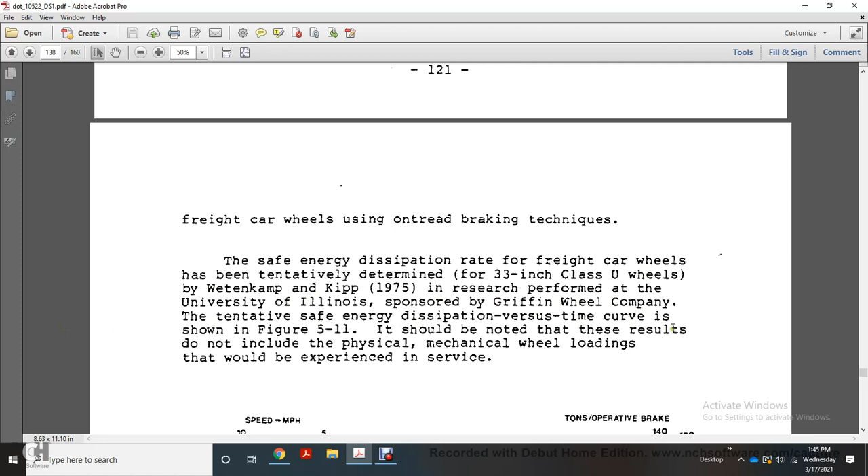Safe energy dissipation rate for freight car wheels was tentatively determined for 33-inch Class U wheels. This was from 1975 research performed at the University of Illinois and the Griffin Wheel Company. The tentative safe energy dissipation rate versus time curve shown in Figure 5.11 should be noted, as the results do not include physical and mechanical wheel loadings that would be experienced in service.

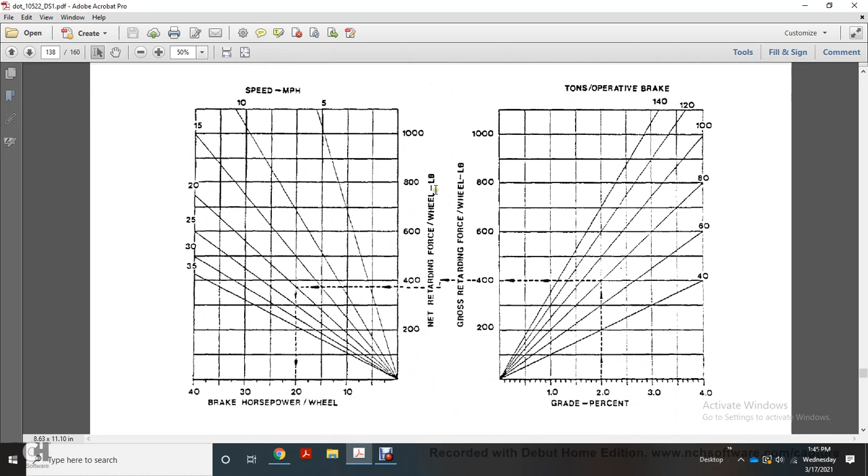It shows brake power in horsepower on the wheel, net retarding forces in wheels, gross retarding forces in wheels, and grade percent.

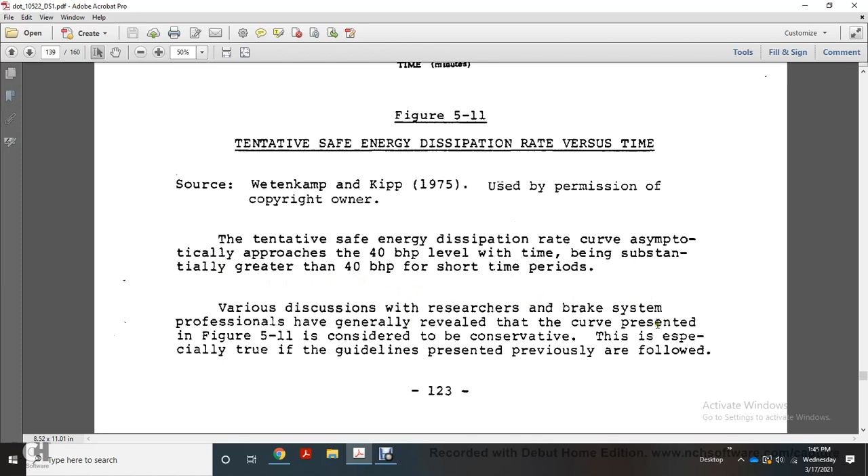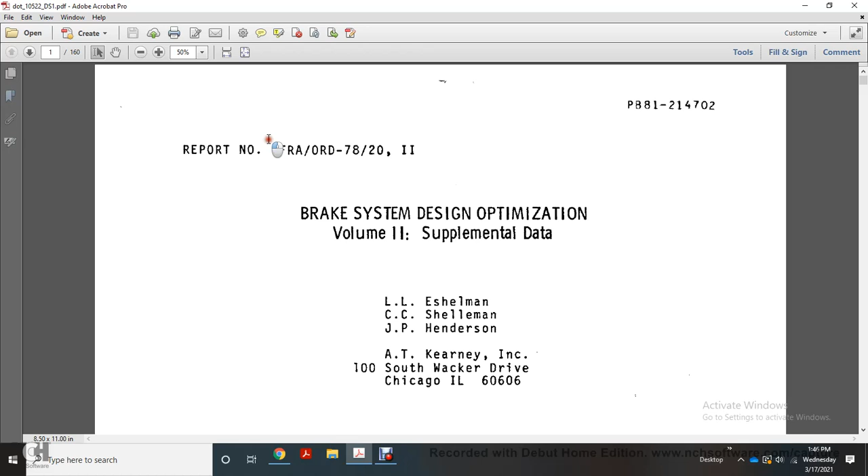Various discussions with brake system professionals generally reveal that the curve presented in Figure 5.11 is considered conservative, especially if the guidelines presented previously are followed. This leads into Appendix A, completing the reading of the Brake System Design Optimization Volume 2 Supplemental Data Report, number FRA-ORD-78-20.